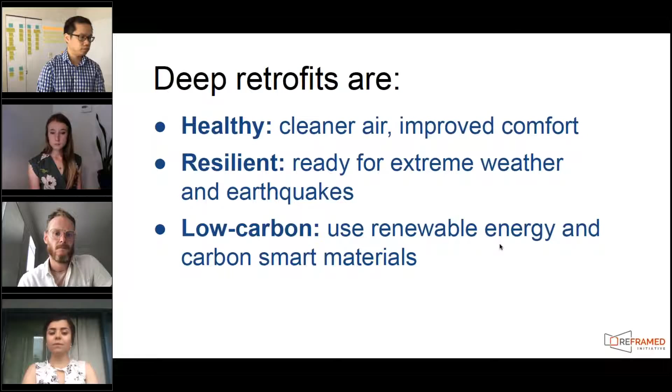Scaling up retrofits is not an easy task, and we have to keep these goals in sight. We need to keep rent affordable. We need to minimize tenant disruption, particularly in cities like Vancouver, where the vacancy rate is below 1%. And we need the energy efficiency investment to return value to the owners and investors.

To get everyone on the same page, we created a primer for today's webinar. It's available for download in the Handout section of your GoToWebinar panel. The primer will also be posted online together with the recording of today's session.

The primer highlights the importance of addressing embodied carbon as we look for building retrofit solutions. It briefly describes several building retrofit strategies for reducing embodied carbon and explains why and how embodied carbon is becoming the dominant source of building emissions in certain areas. We are hoping that the primer kickstarts further discussion.

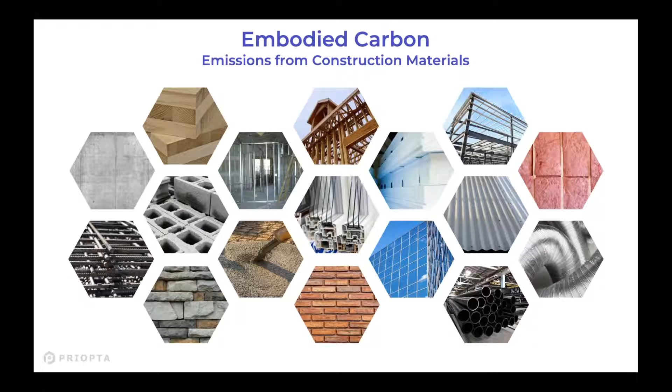And they're often actually hidden from us. The energy side of things is very easy to measure and quantify. But when it comes to the materials, we actually have to think through what are the emissions associated with extracting those resources, transporting them, manufacturing, processing, construction, operation, and also end of life.

So this is a big deal because if you look at global emissions happening annually, about 28% of global CO2 emissions is attributed to building operations. That's heating and cooling and operating all of the buildings on the planet. That's 28%. The embodied carbon annually is about 11%. So that's all the new construction and major renovations that take place each year.

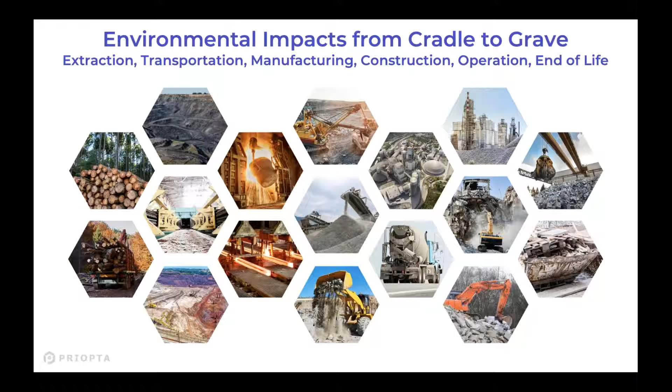That's about 11%. But what's interesting is, many people have seen that statistic, but there's also this great chart from the World Green Building Council that recently got released, which looks at the impacts of even 3 key materials used in buildings: concrete, steel, and aluminum. And if you look across all 3 of those materials, that accounts for 22.7% of global emissions. Obviously these materials aren't just used in buildings, they're also used in infrastructure, cars, and other products. But as the construction industry, if we can create demand for low carbon concrete, steel, aluminum, and other products, it has a ripple effect in other industries as well.

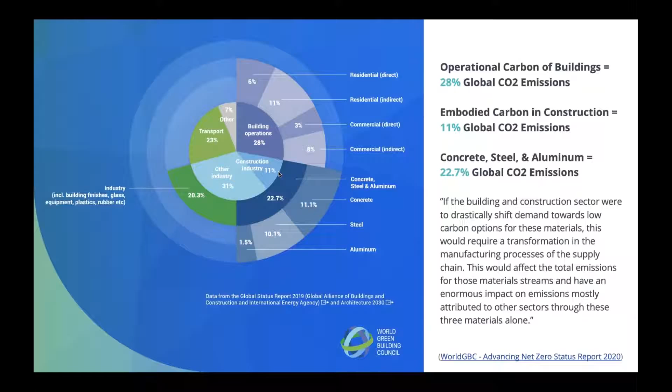So when we're talking about the impact of our industry, it's actually larger than even that 11% slice from an embodied carbon perspective. Now, if you just look at the new construction taking place between now and 2050, over the next 3 decades, for that amount of building stock, embodied carbon will account for approximately 49% of the overall emissions of that building stock over its lifespan, versus 51% for operational carbon.

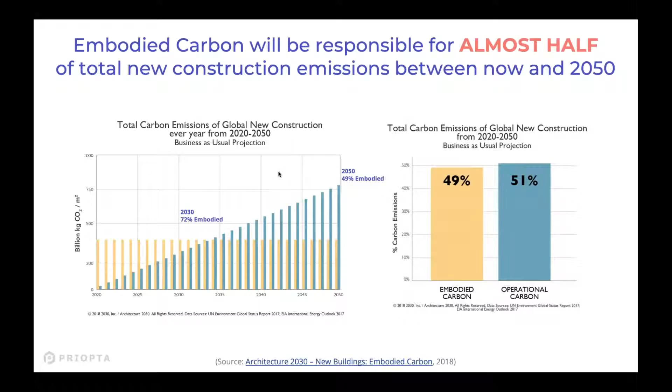This is a picture, or a simplified representation, of the emissions throughout the lifespan of a building. The yellow bars show the emissions happening each year to operate the building, and that's what we've obviously been focused on with our retrofits or with energy efficient designs of new buildings, to get this number down. But there are also the red portions, and that's the emissions associated with embodied carbon. There's a big pulse of emissions up front, and then there's also emissions associated with replacements and maintenance of certain building components and materials, and then emissions associated with end of life.

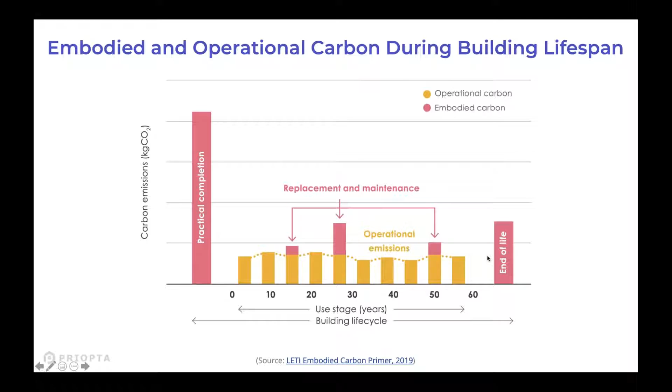So the A stage is the upfront carbon. The B stage is the use phase, so the building operation. Incidentally, the B6 portion, that's operational energy use. So that's the portion that we've been very familiar with: energy modeling, operational carbon emissions, etc. And then there's the end of life portion. So all the emissions associated with deconstruction, transportation, waste processing, disposal.

And then there's a module D as well, life cycle stage D, which deals with benefits and loads beyond the system boundary. So how do you account for things like recycling, reuse, where you don't include double counting in a way. So we usually report that separately as well.

Now, how does embodied compare with operational carbon emissions? In the operational world, we're very familiar with energy metrics, energy use intensity, EUI, but we oftentimes use that as a proxy for carbon emissions, but it's not always the best proxy. So if you look, this is from the CaGBC's report. The dark green bars show you baseline building performance, operational greenhouse gas intensities. And so you can see it varies significantly, right?

Like Vancouver might be 20, Toronto 26, Calgary could be like 71, which is partly due to the higher carbon intensity of their electricity grid. So these are just for baseline buildings. However, if you go towards higher energy performance buildings in Vancouver, we can get much lower numbers. So here's an example of those lower numbers.

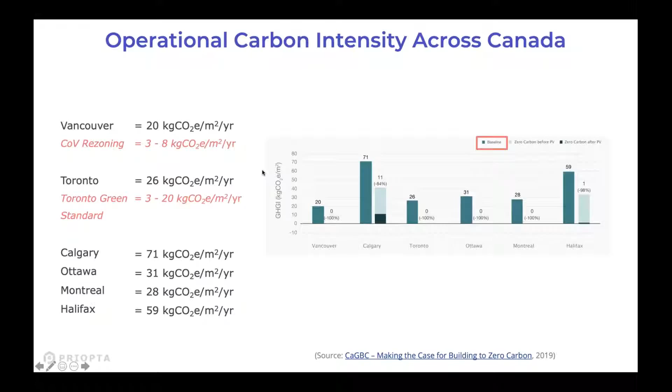So this was a great study done by Integral Group looking at the BC Energy Step Code. So you can see for each of the steps, step 1 to step 4 or 5, obviously the operational greenhouse gas intensities are going down, but actually the big factor to greenhouse gas intensity reductions is fuel switching. So all the green bars refer to natural gas or hybrid systems, whereas the blue bars are electric. So you can see obviously the electric ones are significantly lower.

They're below 2 kilograms of CO2 per meter squared at any step, versus the natural gas ones are, let's say, 4 to 13. But still, even the natural gas numbers are quite low relative to other cities and other regions. So now you have some sense of the operational carbon intensity, and this was just a picture of the variance in the carbon intensity of the electricity grid in different provinces.

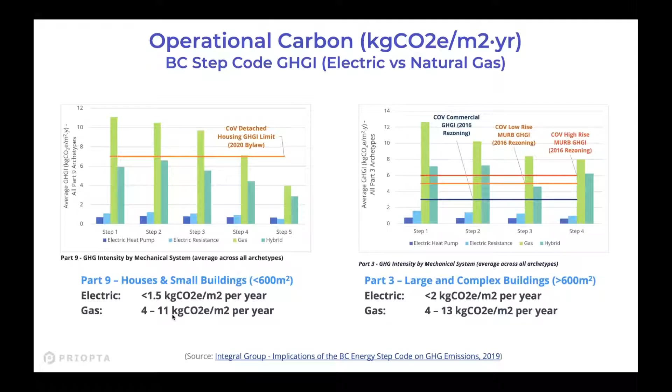So it matters a lot, the carbon intensity of the grid, and also the trend lines, like are these grid intensities reducing over time, and how does that factor into our operational emissions? So that was the piece on operational. That's just to give you some context when we're comparing those numbers with embodied.

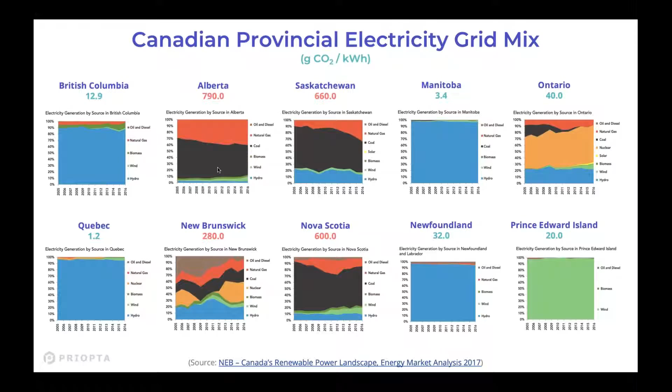So you compare that with the operational numbers, because in BC, we've gotten our operational greenhouse gas intensity so low, especially if they're electric buildings and step code, it's below 3 kilograms or below 2 kilograms of CO2 per meter squared. These numbers become the dominant factor.

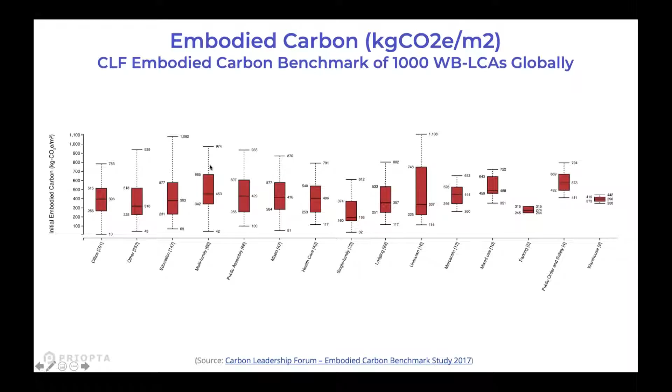At this stage, they just need to disclose the results, but next year I think they're going to update the rezoning requirements, where they'll likely have some sort of reduction requirement. Additionally, if it's not a residential building, you also need to go for LEED Gold. And so the LCA and looking at embodied carbon is one of the strategies that oftentimes teams overlook, but you can get up to 5 LEED points through pursuing those credits, depending on the percentage of embodied carbon reduction potential there.

So for all of these standards, CAGBC Zero Carbon Building Standard, ILFI, LEED, they have some requirement, or it's relevant to quantify and reduce these embodied carbon emissions. Now I'm going to get into some of the design strategies. In my typical presentation, I go through a lot more different materials like concrete, steel, and wood. But in this case, given the time constraints, I'm focusing on some of the key materials as it pertains to retrofits: glass, aluminum, insulation, refrigerants, mechanical equipment, and interiors.

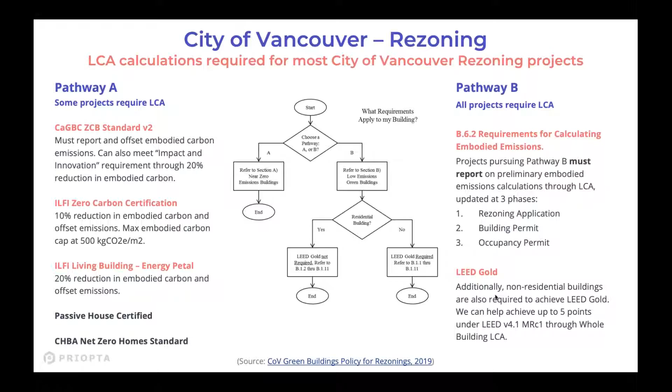So for glass, typically we use large quantities of glass, obviously, in the building. Whenever you're dealing with anything envelope related, it's important to look at the trade-off between embodied carbon and operational carbon. It may not actually be a trade-off, but you look at how to optimize across both of those domains, right? Obviously, if you have triple pane windows, that's another pane of glass versus double pane windows. But generally speaking, what I've seen is that the glazing is not a huge component of the overall impacts.

The frame actually is a big factor though. So it's not necessarily the glass, although there's obviously emissions associated with that, but pay attention to the framing options that you're using. Typically curtain wall assemblies are actually the highest embodied carbon impacts out of the different wall assemblies from what I've seen, and that's partly due to a lot of the aluminum mullions. But if you go towards timber framing, that can reduce the emissions a bit.

Segueing into aluminum, aluminum is a very high emission intensity product. It requires something like 10 times the amount of electricity as opposed to steel. So given that it's an electricity driven process, it matters where this aluminum is produced. For instance, in BC, because we have a very clean electricity supply, the aluminum that we produce is likely going to be very low carbon intensity. Although I haven't seen EPDs, environmental product declarations, for this, generally speaking we should have pretty clean aluminum.

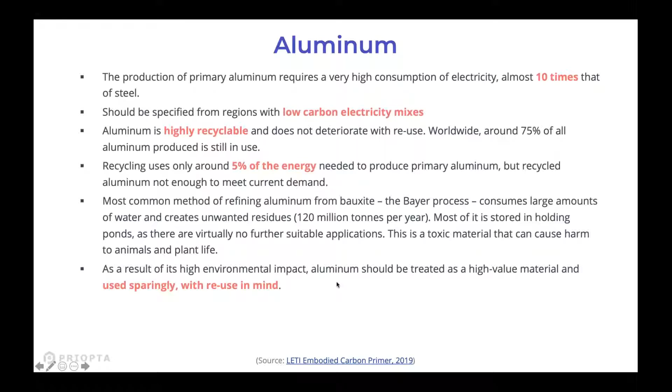Now, before I transition to the next topics, some of you may have seen this book before. It's called Drawdown. They looked at the top solutions to climate change, to reducing emissions globally between now and 2050. Many people will probably think of things like solar or wind or different renewable technologies as the top solutions. But actually the #1 solution in their original analysis was refrigerant management, which was very shocking to me and to a lot of people. They estimated roughly 89 gigatons of CO2 over the next 3 decades, which is equivalent to roughly 2 years of annual CO2 emissions.

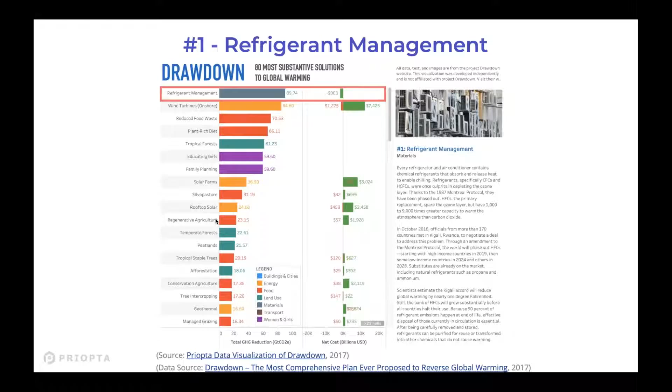In contrast, if you think about embodied carbon, we oftentimes talk about concrete. Their quantification of the emissions reduction potential for alternative cements was in the order of 7 gigatons of CO2. So it's interesting that refrigerants were so high. Now, whenever you see any sort of CO2 related statistics, from the IPCC's reports on global climate change all the way down to national reporting statistics, they're using what's called GWP 100, which evaluates a range of different greenhouse gases and makes them equivalent to CO2 over a 100-year time horizon.

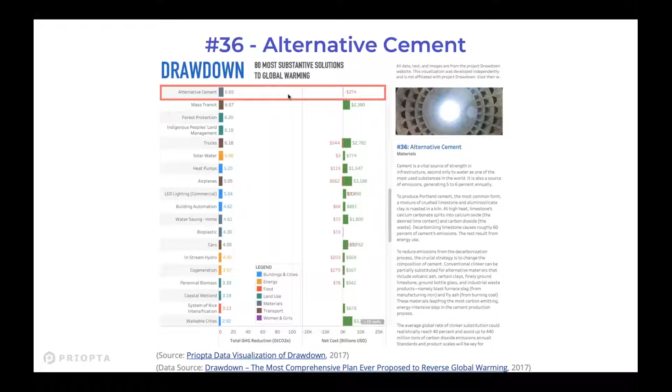And this makes sense because CO2 lasts in the atmosphere for thousands of years, and other greenhouse gases can last even longer. However, there are also some greenhouse gases that last much shorter. For example, you may have heard that methane is 28 times higher impact than CO2. But over a 20-year time horizon, it's actually 84 times higher. So it's about a 3x difference depending on which metric you use. And the same is true for different refrigerants. And why this is important is because methane's lifespan is something like 14 years.

For most refrigerants, HFCs, hydrofluorocarbons, they're about under 20 years for many of these refrigerants. So looking at a GWP 20 metric, you actually see for many of these refrigerants, they're 2 to 3 times higher than even the emission figures that we typically use in all of our calculations. So that means if we actually reduce these emissions, we have a very immediate impact on climate change, much more so than even CO2 in a way, because when you decrease these emissions, they stop having an impact on global climate change more immediately. So it helps us avoid tipping points, etc.

So why I'm bringing this up is because we actually use those HFCs not just in refrigerants in our HVAC equipment, but also in our insulation. So for example, if you look here, this is in particular XPS insulation and spray foam insulation. In North America right now, it's mostly using HFCs. Actually, I think for XPS, we only have HFC blowing agents for those. And remember those life cycle stages I mentioned earlier? Module B is a big chunk of those emissions.

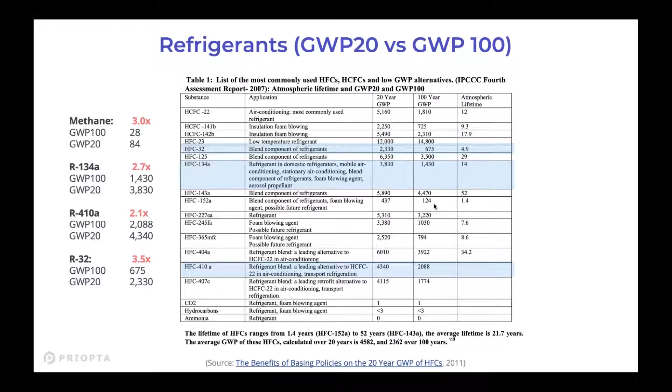So most materials are typically inert and not really emitting emissions, but with the exception of these ones which have blowing agents. And so if you look at the LCA studies, the EPDs from these different manufacturers from Dow and Owens Corning, you see that they actually have pretty significant emissions at the operation phase and also at the end of life stage.

And why I bring this up is because some of these emissions have been underestimated in our whole building LCA calculations. So the 3 main tools that are typically used in North America, Athena, Tally, One-Click LCA, what I've seen is that some or all of their XPS entries are oftentimes about 10x lower than the numbers straight from the EPDs from these different suppliers. And part of it may be due to how they accounted for HFCs, et cetera.

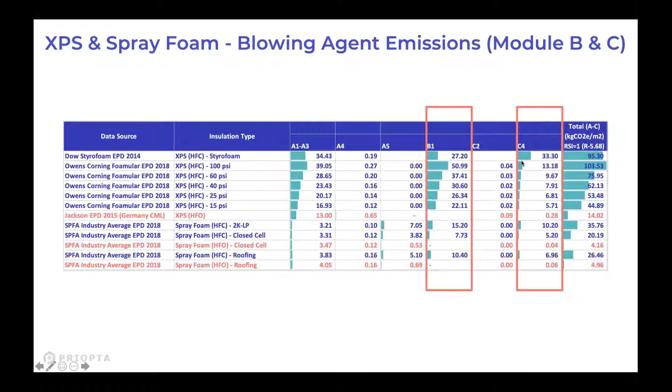And so compare those numbers with the whole building LCA numbers that I mentioned earlier, and you can see why these numbers are quite significant and how some of our previous LCA studies, if they have XPS and spray foam in them, may have actually underestimated these emissions quite a bit.

Now, there is going to be new HFC regulation coming in Canada and certain US states starting January 1st, 2021. So there will be alternative XPS and spray foam that uses lower global warming potential blowing agents. So make sure you specify that if you're in those regions. Or actually just in general, you should specify that.

I may be actually going a little bit over time.

So in terms of refrigerants, we need to worry about the global warming potential of different refrigerants and also the leakage rates. And there's a lot of uncertainty as to the percentage of leakage happening each year. I've seen figures of, let's say, 2%, sometimes up to 10%. But I've also heard anecdotally that sometimes in HVAC systems, when they leak, the whole system leaks. So then you've actually lost 100% of the system. So we need to get a handle on this leakage rate data.

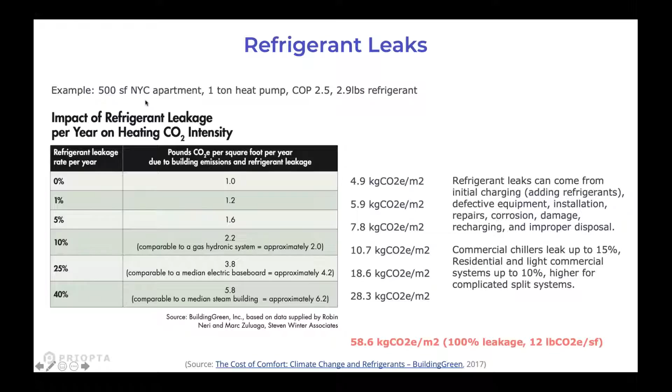So these assumptions do matter significantly. When you're doing retrofits, think about your refrigerants, what type you're using, and the leakage rates. And that was just on the refrigerant piece. When talking about mechanical equipment, we typically don't include this in the scope of our whole building LCA calculations because we're mainly focused on structure and envelope, and there's not really good data for mechanical equipment.

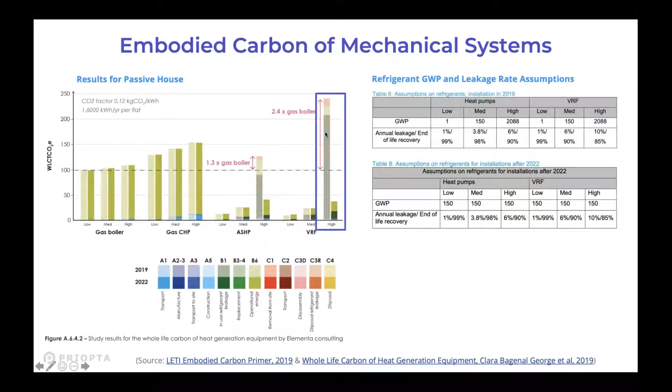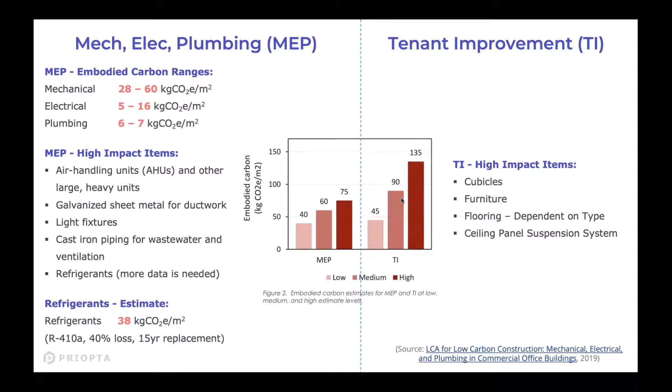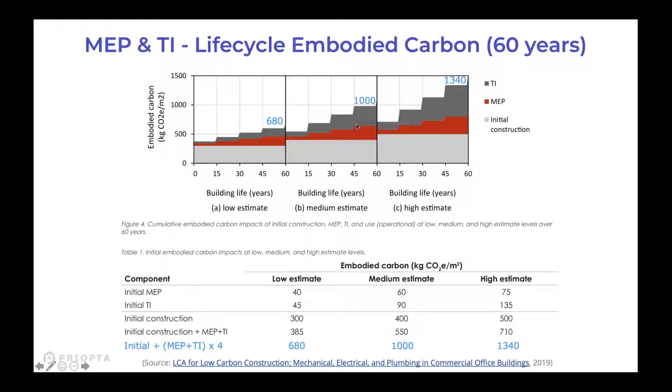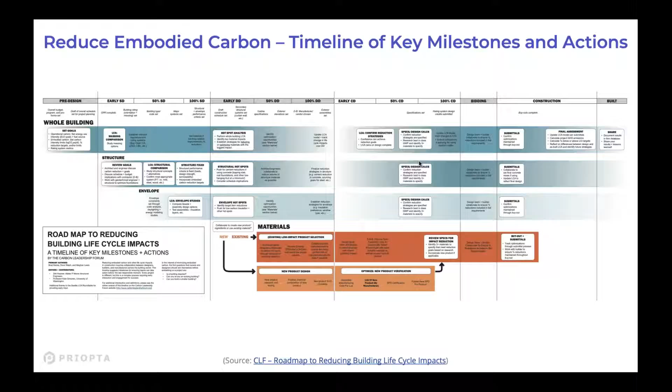Great, thank you so much, Anthony. Yeah, very useful, no problem. Very useful to see how embodied carbon compares with operational carbon emissions in buildings, considering the carbon intensity of the electricity grid. I personally find it very important to highlight why we really need to have these discussions and think about embodied carbon in our building design processes. And also very useful to hear from you what are some specific design strategies that can help us reduce embodied carbon in building retrofit in particular. Thank you very much for your presentation. With that, I am going to invite our next speaker to the screen. Lindsay, over to you.

Great, thanks. And let me know if you can hear and see my screen. All good, yeah. Perfect. All right. Hi, everyone. Thank you for having me. I'm thrilled you're here and wanting to learn more about embodied carbon reductions.

And I'm thankful for Anthony for introducing embodied carbon and providing a lot of great resources and great opportunities for reduction. I wanted to share with you a combination of work that'll hopefully give you a bit more insight on how to reduce embodied carbon in your work. So the question of the day: how do we reduce embodied carbon? The way we've been looking at this issue at Architecture 2030 is pretty similar to how we look at meeting operational code requirements.

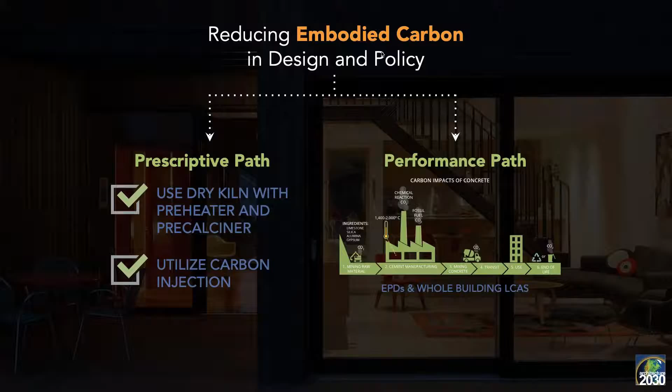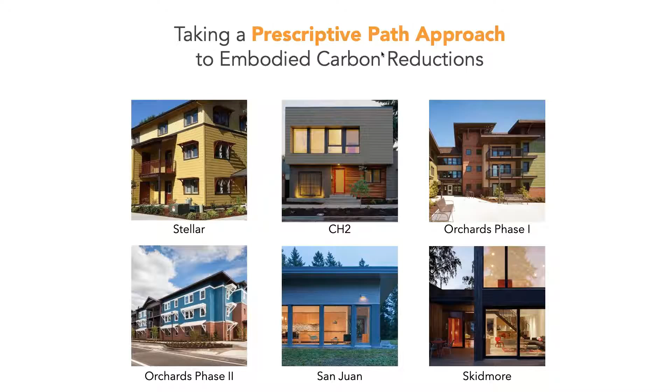The research project I want to share with you is one I did with Allison about 3 years ago, in which we modeled and compared the embodied carbon impacts of several Pacific Northwest passive house projects. We focused on passive house because both Allison and I are certified passive house consultants—I began as a CPHC about 5 years ago—but also because passive house sets a very high standard threshold for operational energy performance. We wanted to see what the embodied carbon impact of that was, and whether there were opportunities for reducing embodied carbon while still meeting stringent operational performance requirements.

So how do we go about doing this? Right around the start of this research, Allison and colleagues published the Passive House Details book, an incredible resource that includes wall assembly details for many passive house projects in the Northwest and across North America as a whole. I took six of these details and modeled them in Revit, then ran them through Tally, which, if you're not familiar, is an embodied carbon plugin for Revit developed by the design firm Kieran Timberlake.

Within Tally, you can control inputs like the type of material, transportation distance, etc. It uses a database of EPDs and multiplies the embodied carbon impact by the material quantity in your design. I should note that typically you'd want to do a whole building LCA, but for this comparison we simply modeled a 5 by 5 foot area of wall assembly—not the roof or floor assembly, which often have a much higher embodied carbon impact due to structural requirements, foundations, and a higher amount of insulation.

I also want to note that we used Tally 2017, which does not have the same features available in the latest version of Tally. That would likely change the results slightly if we were to run it again today.

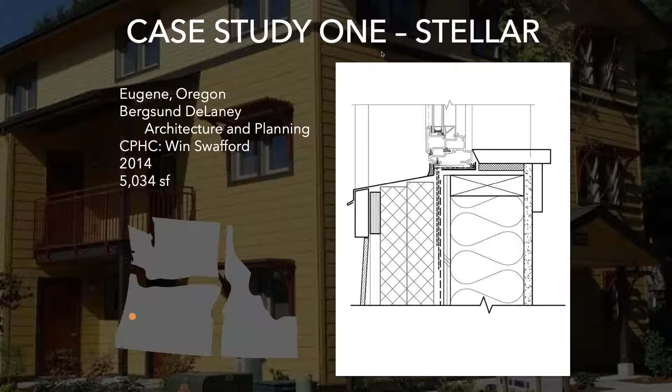So the first case study we looked at was the Stellar Apartments. This was the first affordable multifamily passive house in the US, located in Eugene, Oregon, completed around 2014. From inside to out, this wall assembly was gyp, a 2x6 stud with blown-in cellulose, OSB with the seams taped as the air barrier, and then outboard of the stud was 4 inches of polyiso and fiber cement siding.

The second case study was a single-family residential project in Portland called CH2. For this wall assembly, inside to out, we had gypsum board, a 2x4 with blown-in fiberglass, plywood with the seams taped as the air barrier, a 9.5-inch TJI with blown-in cellulose, 1.5 inches of fiberboard, furring, and then fiber cement siding.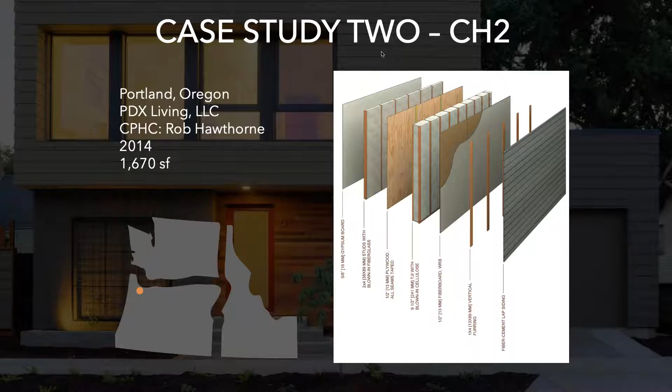The third case study was a very large multifamily project: Orchards at Orenco Phase 1, also located in Portland, Oregon. From in to out, this was gyp, a 2x10 with blown-in fiberglass, plywood as the air barrier, 1.5 inches of mineral wool, finished with fiber cement siding and brick. For this comparison, we chose a segment of the wall that used brick, since most of the projects actually used fiber cement siding, so we wanted a bit of a comparison there.

We also looked at Orchards at Orenco Phase 2, which was the exact same wall assembly, also located in Portland, except they were able to reduce the thermal components of this envelope while still meeting PHIUS certification. The 2x10 with blown-in fiberglass became a 2x6, and the 1.5 inches of mineral wool was reduced to 1 inch. Again, we looked at a portion of the wall assembly with brick.

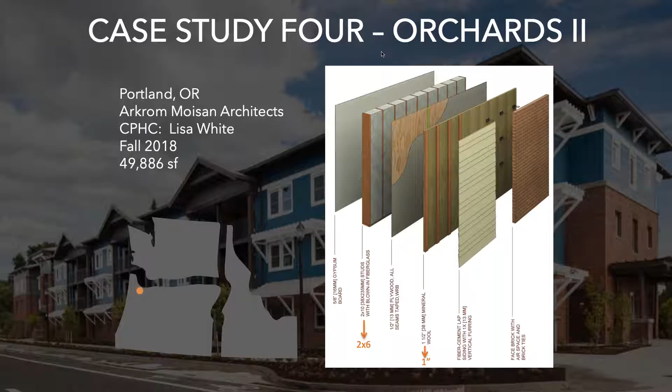So the fifth case study we looked at was San Juan, another single-family residential located in the San Juan Islands in Washington, completed around 2013. From inside to out, this wall assembly had gyp, a 2x6 with dense packed fiberglass, OSB with the seams taped as an air barrier, another 2x6 with dense packed fiberglass - so a double stud wall approach - and then 1/2 inch of fiberboard, steel furring, and fiber cement siding.

And then the last case study we analyzed was Skidmore, another single family residential, located in Portland, completed in 2013. From in to out, this one had gyp, again as always, a 2x8 with blown-in fiberglass, plywood as the air barrier, 3 inches of polyiso, wood furring, and then vertical wood siding.

So how do they compare? This is normally where I would ask you what you think - which wall assemblies have the highest or lowest embodied carbon, or if you think they are all roughly the same. So I want you to think about that mentally, and then I'll share the results with you.

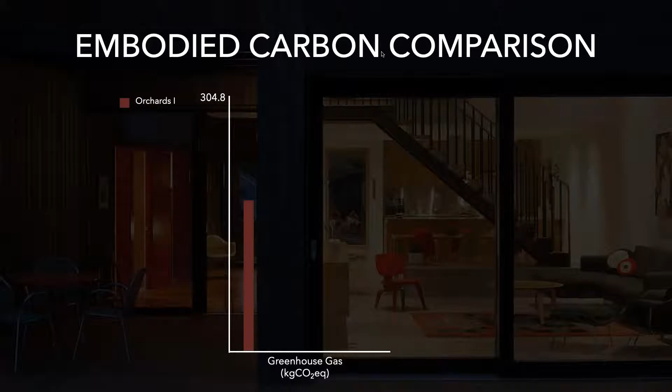So drumroll please. From lowest to highest, we have Orchards at Orenco Phase 1, Orchards at Orenco Phase 2. So you can see that the reduction in the thermal envelope did in fact reduce the embodied carbon of that wall assembly - not surprising. Then we have CH2 and San Juan.

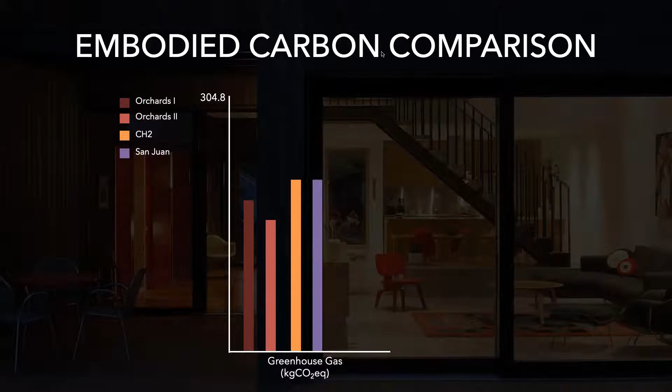And from there we have Skidmore and Stellar. So you'll see some common groupings here. These first two were a wall assembly that had a stud and then exterior mineral wool. The second two here took a double stud wall approach. And then the last two here were a single stud with insulation and exterior rigid insulation, so they both used polyiso.

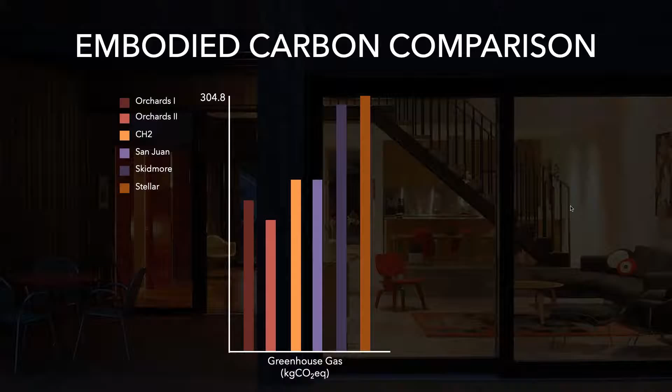All right, so this is great, but you're probably curious what materials contributed the most to each wall assembly's embodied carbon impact. To dive into that a little bit, for Orchards 1, brick actually made a significant impact. Had we looked at fiber cement siding, this would probably be lower, but the brick alone was about 1/3 of that wall assembly's embodied carbon impact.

Plywood, the 2x10 with fiberglass. Mineral wool, also a pretty significant chunk. And then gyp.

For Orchards Phase 2, same amount of brick, so same amount of embodied carbon, same with the plywood. You'll see here the 2x8 with fiberglass, a slight reduction in embodied carbon from the 2x10. And then the 1 inch of mineral wool, a more significant reduction from the 1.5 inch. And then gyp.

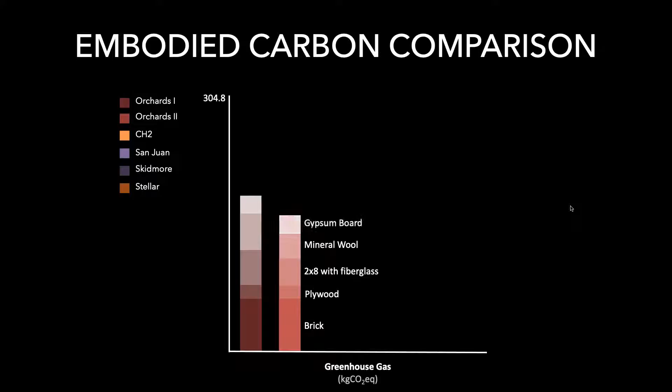For CH2, medium density fiberboard - this is surprising for quite a few people, but it actually has a really significant embodied carbon impact, and again this was only 1/2 inch of material. Plywood. The wood furring. This is the 2x4 with fiberglass and the 9.5 inch TJI with cellulose.

One note here - so CH2 uses a TJI, but that wasn't a material available within the Tally database. So for this study, we assumed a 2x10 stud. Even though TJIs have less material overall, they do require more manufacturing, more adhesives, and would likely result in a higher embodied carbon impact. Though I would be curious to see how much of a difference that would make.

The fiber cement siding - here you can see the difference between the fiber cement and the brick. Had we looked at a portion of the wall in Orchards that used fiber cement siding, you could see it'd be a reduction there as well. And then gyp.

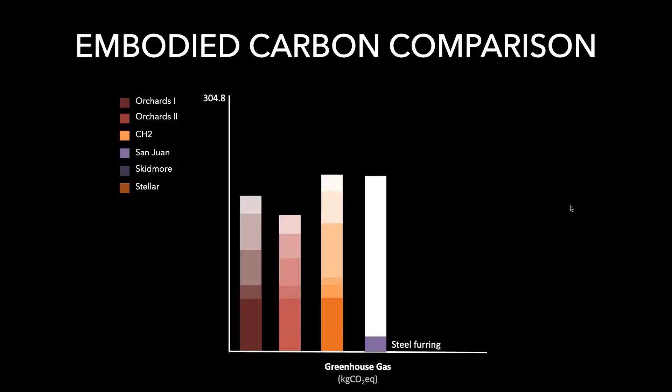For San Juan, so the steel furring, medium density fiberboard, again a pretty high impact. OSB - you'll see OSB is higher than plywood for the same function within the wall. This is the double studs, the 2x6 wall assemblies with fiberglass, the fiber cement siding, and the gyp.

All right, for Skidmore: plywood, the wood siding, the 2x8 with fiberglass, 3 inches of polyiso. You can see it's almost half of this wall assembly's embodied carbon impact. And then gyp.

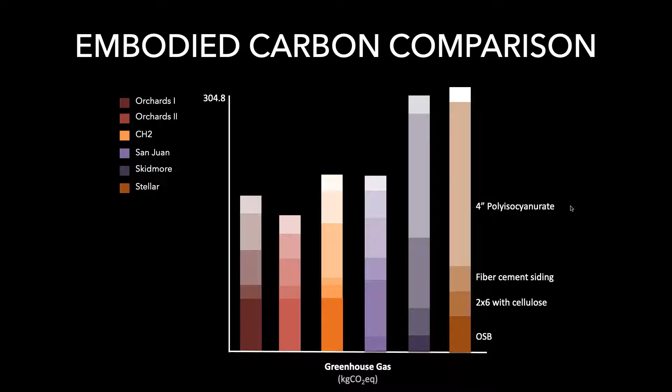And then finally with Stellar, we had OSB. Here they used a slightly different thickness, so you can see it's a higher embodied carbon impact than other wall assemblies. The 2x6 with cellulose, fiber cement siding, 4 inches of polyiso - again now almost 2/3 of the embodied carbon impact of this wall assembly, and gypsum board.

A few notes here: the variances you see in similar categories account for different assumptions. For example, different densities of fiberglass affected the embodied carbon impact, and different thicknesses of OSB also had similar effects. So if you're using Tally and these tools as a performance path approach, the assumptions you make have a huge impact on the results you get.

So they say the tools are only as good as the user, but it is a good opportunity to get a better understanding of embodied carbon.

I also want to note that the newer version of Tally offers the opportunity to include biogenic carbon, which this version did not. Including biogenic carbon for timber products and cellulose results in a lower, and often negative, embodied carbon value, because it gives credit for the carbon sequestered by the tree during its time growing. There's a great tutorial on this topic done by Tally.

I'd be happy to provide the link to that. I should have included it on the slide, but the newer version of Tally does include that opportunity, and it does make a pretty significant impact.

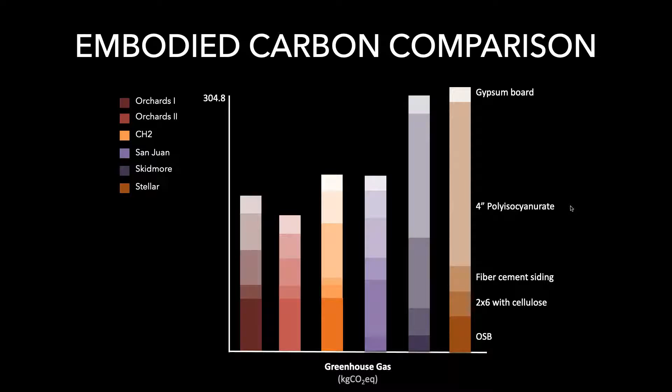To conclude this portion, as you can see, blown-in cellulose and fiberglass had a lower embodied carbon impact than rigid insulation. I should clarify, in case it's needed, blown-in is very different from a blowing agent. There's a very significant difference there.

Other conclusions: polyiso and MDF, the medium density fiberboard, were major contributors. Mineral wool also had a high embodied carbon impact. However, in those first two Orchards wall assemblies, it was lower overall than the other wall assemblies. So if you have to use a rigid insulation for climatic conditions or whatever, it's probably best to choose mineral wool over polyiso, EPS, and especially over XPS.

And again, a reminder that this study only addressed wall assemblies, so it's equally important to do a whole building LCA and look at the roof and floor enclosures as well.

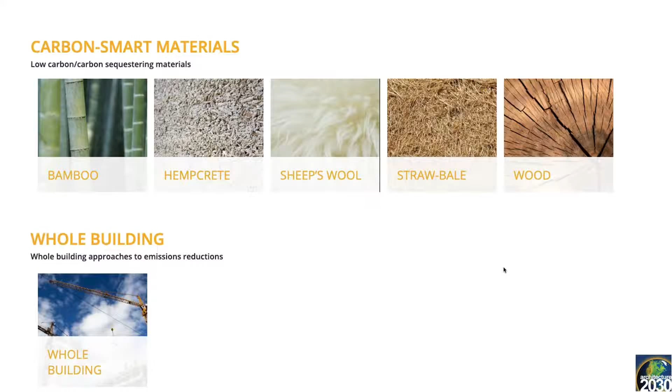Each material we call a swatch of the palette. Each material swatch contains an introduction with information on the carbon impact of that material or material category. It also talks about carbon smart attributes — what qualities of the material or manufacturing process can be used to reduce embodied carbon. The second set is design guidance: how do you design with that material to reduce embodied carbon?

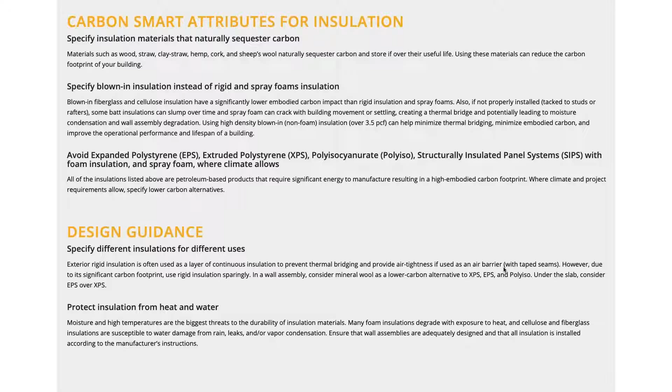Several of the swatches also include an acknowledged challenges, questions, and unknowns section. The palette is a living document, intended to be updated over time as more information becomes available and technology advances. For example, we recently updated the concrete swatch, and we're working on updates to the wood swatch currently. But for insulation in particular, an acknowledged challenge is balancing operational performance with embodied carbon impacts, as well as the fact that insulation decisions are highly climate dependent and situational dependent within the project.

So just to dive a bit into each material, and thank you Anthony for focusing on aluminum and glass, so I can cover the rest of it.

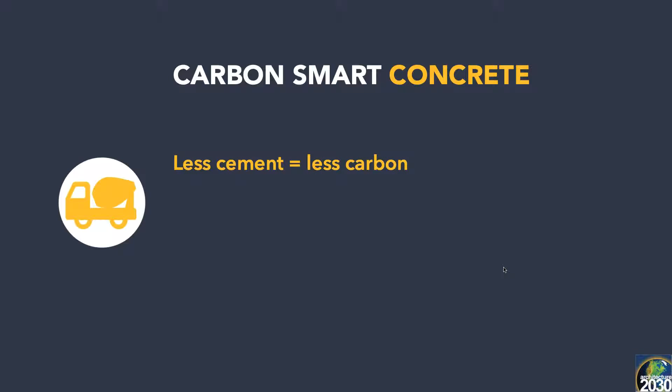For concrete, the most impactful thing you need to know is that less cement means less carbon. You can often use cement as a proxy for global warming potential, so if you reduce the amount of cement within a mix, you're reducing the embodied carbon impact. Typical practice is to specify a minimum amount of cement and/or a maximum allowable amount of SCMs. Instead, we're saying flip that around: specify a maximum cement content, or specify the required compressive strength at a specific age. Those are opportunities for reducing the embodied carbon of concrete through specification.

For steel, specify steel with a high recycled content. There are two different manufacturing processes for making steel. One creates virgin steel, using raw materials to create a new steel product. The other, an electric arc furnace, similar to aluminum as Anthony was saying, recycles existing steel into new steel products. The electric arc furnace is about five times less embodied carbon impact than the basic oxygen furnace, which creates virgin steel. So if you're specifying steel with a high recycled content, you know it's going to come from an electric arc furnace, which is powered by electricity. So similar to the grid mix information Anthony shared, where you're getting that steel from does have an impact. There are opportunities for getting steel manufactured using completely carbon-free renewable energy—there's actually a handful of steel mills within North America that do just that.

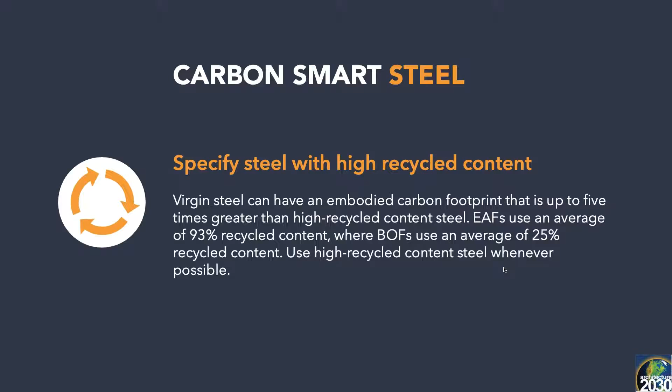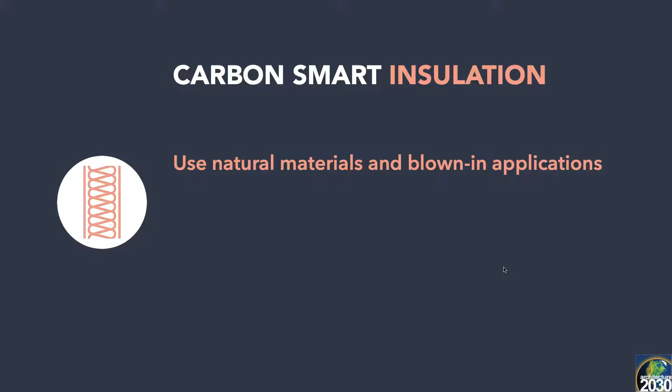For insulation, use natural materials. There are so many materials that naturally sequester carbon that can be used as insulation, so look into them and start incorporating them into your designs.

Also use blown-in applications—this is different from installations with a blowing agent. Blown-in fiberglass and cellulose are recommended because if you're using batt insulation, it can often slump, meaning it settles over time. That can lead to thermal bridging, which can lead to moisture condensation, which can lead to assembly degradation, which increases the embodied carbon impact because you have to replace that material. What we found is that using blown-in insulation actually reduces that potential.

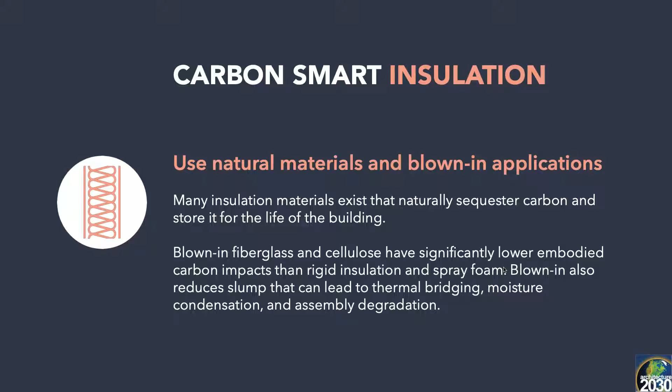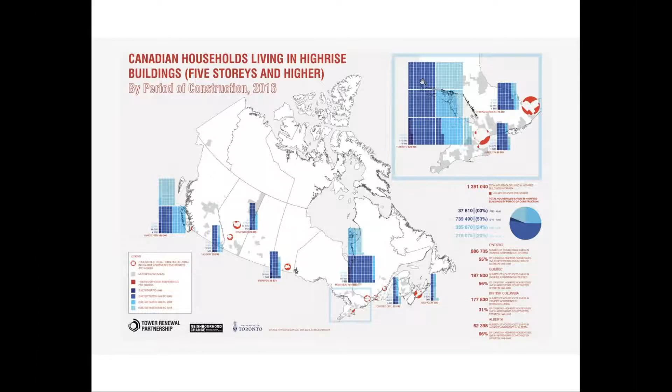So if you look at Vancouver, it's almost a third of the different eras of high-rise housing, including the older 60s stock. But if you look at the Toronto stock or Ottawa or elsewhere, the majority of high-rise housing is that first generation. So that's the focus of this. It's about 700,000 units across the country. And some of the aging is becoming critical.

So we're finding some buildings that are simply having to go offline because of failed systems, failed electrical systems. The elevators are routinely failing, and especially in COVID, with people sheltering in place, it's become quite an acute issue. There's an imperative to keep these buildings going in a way that's healthy, appropriate. And now looking through the lens of embodied carbon, how do we do it in the best way possible? So a lot of our focus is how do we make this work?

Doing retrofits like this is highly capital intensive. So you need the finance structure in place. You need the standards. And this conversation today is really what are some of the metrics of standards by which owners, decision makers, and designers engage in setting the specifications for these projects. And you need a retrofit industry that's ready, especially a retrofit industry that can tackle buildings with residents in place.

So a lot of this has been a lot of policy pushing and activism and making voices heard that this is an imperative, and how do we push the players and the stakeholders to be able to bring investment to these buildings. And a major victory has really been with the National Housing Strategy, which launched a repair and renewal program of several billion dollars to be able to kickstart the first generation of deep retrofit across the country.

And we have fantastic leadership in Hamilton Housing, just outside of Toronto, who have a passive house and low energy mandate for their entire stock. They have a new building program going for new buildings, and they also, looking at their existing stock, wanted to engage in EnerPHit. So we've worked with them since 2017 to engage in feasibilities and to put the applications together for grant funding and everything else to be able to reach this goal.

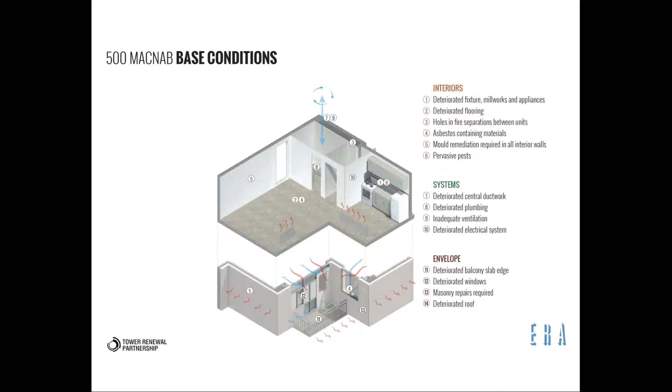And so this is a typical unit. This is a long list of all the things that were deteriorated, including huge amounts of asbestos, mold embedded in walls, completely deteriorated soil stacks. So there was a massive state of repair piece, but then also the layers of achieving EnerPHit. So, a big winter coat on the outside of the building, triple glazed windows, and a strategy of active and passive ventilation to be able to provide both heating and cooling to the building.

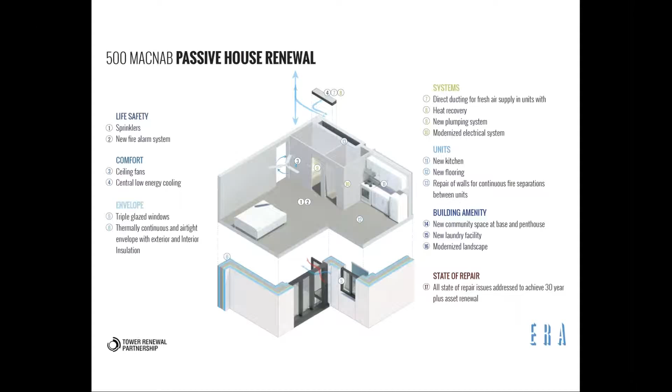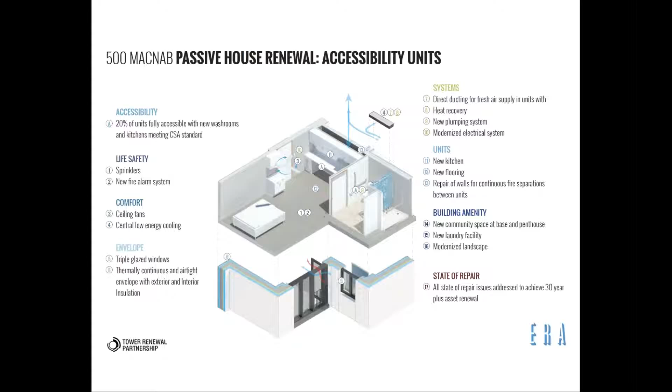And it's a seniors building, importantly, and it was very critical that we maintained comfort. So cooling and a light active cooling strategy was required. And the difference between this image and this image is the major works required to provide a barrier-free unit, which is quite a bit of work in there that was a mandate to the project, but quite a big part of it.

So looking at the envelope. When we first started this project, this is what it looks like. It's sort of block wall with masonry veneer, very robust. We imagined we'd do this from the exterior, to achieve our R38 effective wall. It was a layer of mineral wool and then a layer of mineral wool EIFS on the outside of a sheathing layer. So a sort of a double ply wall. And to make that work, we had to have fiberglass clips and a large thermally broken structure to do this. So that was the first strategy.

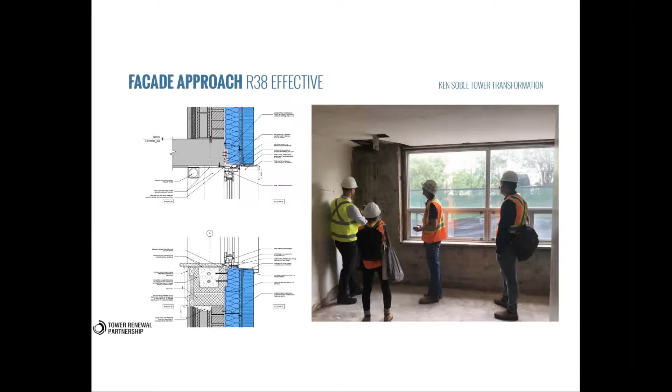When we got into investigations, we realized there was pervasive mold throughout the interior walls. So for better or worse, we had to gut the inside of the building to remove all of that wall, which provided a much more simple wall assembly, one you couldn't do with residents in place, but one that made sense in this particular project, which importantly is empty. The building was actually decanted of residents because of the poor state of building quality before construction. So it makes this project a bit of a prototype to say, how would we then do this in a building that's occupied?

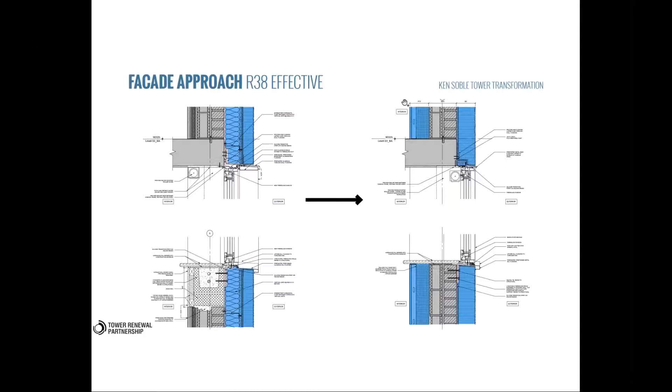And then, of course, as all passive house designers know, there's the exhaustive process of meeting your target and getting your PHPP and getting your pre-certification. And so we looked at a whole series of things, from metal clips to fiberglass clips to where the plane of the window was, and landed on our pre-certified design.

And another piece where we certainly are contributing to embodied carbon is we made the decision to remove the balconies. And the reason for that, through a whole series of studies, is that the kit just isn't available in North America as it would be in Germany or Sweden or other jurisdictions for ready-made balcony enclosures that would have the thermal performance for EnerPHit.

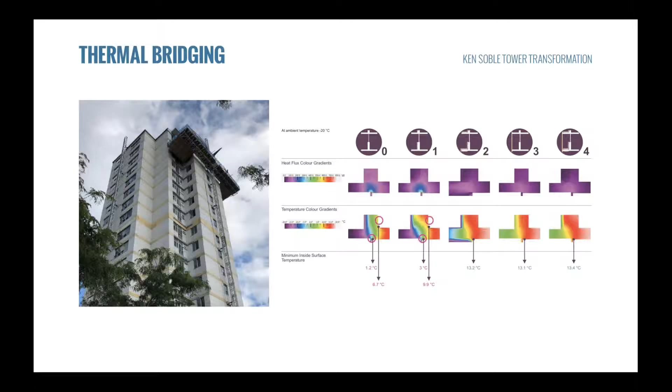So after long discussions, and a main one being there was about a foot drop to make sure that they're actually accessible and barrier-free for a seniors population, the owner decided, let's remove them and make sure we have a thermally tight envelope. But that certainly won't be the strategy for each of these buildings. So it's innovation required here.

And this is a look at some of the windows going on. This is the air barrier, which is fluid applied. And then the mineral wool EIFS will go on top of that. It's a 6-inch buildup.

Then into the ventilation strategy. So we piggybacked off the existing system using the existing cavities throughout the building, putting in new distribution and bringing in direct ducting into each unit, as well as sprinklers into each unit as well. The building hadn't been sprinklered. And so this was interesting.

So we really debated unitized versus centralized, and we ended up going centralized in this case because the point tower configuration made it work, but also the owner, as it's a rental building, didn't want to have to change 147 filters, so really encouraged us to go, and they were about cost neutral. So in this case, it was a centralized system.

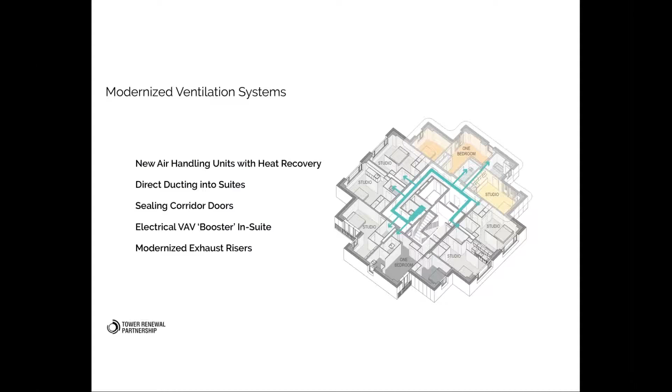This is some of the heating and comfort studies we did with the major consultants on this project. One is JMV Consulting, which is Vancouver Island based, really fantastic Canadian consultants who I recommend everyone work with, as well as Transsolar out of Germany, who've done quite a bit of these high-rise EnerPHit projects. And it was really looking at not just meeting the EnerPHit standard, but looking at what from each exposure is the effective comfort that we'd be achieving. So this was a driver.

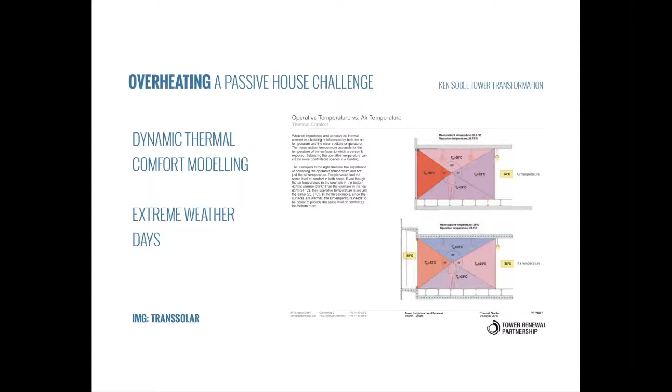And then this is looking at our graduated cooling strategy. So ceiling fans through ventilation, but also a centralized dehumidification and light cooling, and then a cooling boost within each unit, as well as a heating boost within each unit that's directly resident controlled.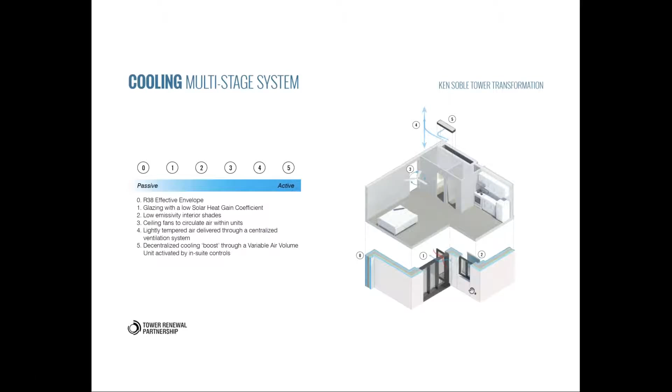One of the issues, we wanted to do exterior shading. It was too expensive to bring over sort of European style exterior shading, so we've gone with interior blackout blinds, but with an 18% window wall ratio, it passed all the EnerPHit requirements, thankfully. And we also modeled performance on 2050 projected data. So we weren't looking at the present, we were looking at the future and ensuring comfort.

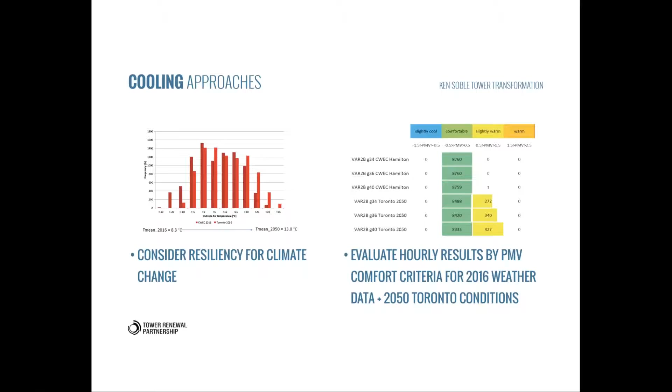And so we were able to look at some of the metrics that were discussed earlier here, and to say, even though we're meeting Passive House in terms of energy per square meter, let's fuel switch for heating and go to heat pumps in order to go to electricity. We wanted to pull the gas line completely on the building, but we were prevented for domestic hot water. To heat domestic hot water electrically, unfortunately, would require a larger transformer than was available within the city district. So it was a logistical issue outside of our control. So the only gas in the building was domestic hot water.

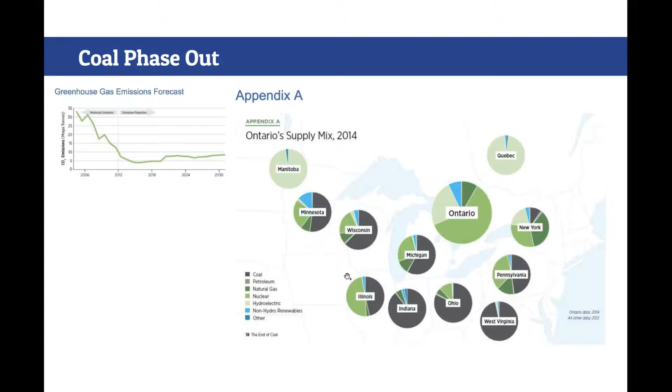The next one is envelope. So envelope was quite a discussion, and the issue, a big one, was safety. So after Grenfell, myself and my team were actually in London when Grenfell happened, and we were meeting with building officials and touring sites for other reasons, and then became kind of embroiled in it. And it was quite an intense experience.

We were actually able to meet with the fire marshal and others when this was all happening. While each system is permitted in our building code, we felt, and the owner felt strongly, that they wanted no combustibility whatsoever on the exterior of the building. So for that reason, we designed this as mineral wool.

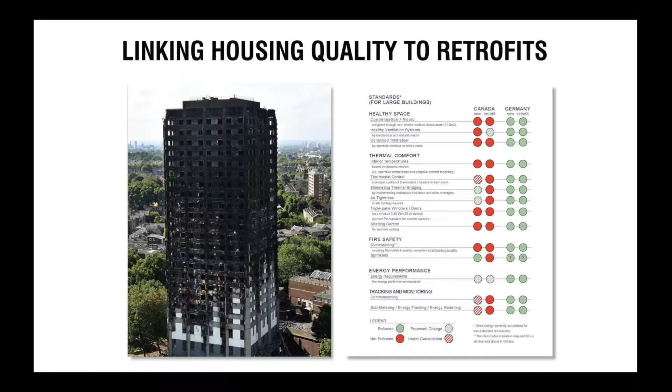And then the added value was, when we did similar analysis to what was discussed earlier, there's such a compelling embodied carbon argument. You could really make the case that if we had gone with EPS or another system, what's the point of even going EnerPHit? So I think that building an embodied carbon argument or metric into the standards is absolutely fantastic. The other one, of course, is demolition versus renewal.

So every time we do a retrofit project, there's always the voice in the room that says, why don't we just tear it down and rebuild it? It would be faster and cheaper. What we found in our set of projects is that it's neither. In terms of cost, even doing this EnerPHit project, which is highly ambitious and nearly an entirely new fit out in the interior, it's still substantially cheaper than if we had torn down and built a new comparable building. And then, of course, there are the social costs if these buildings are occupied.

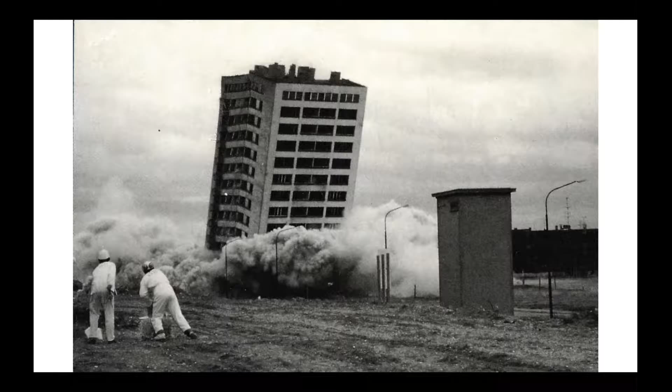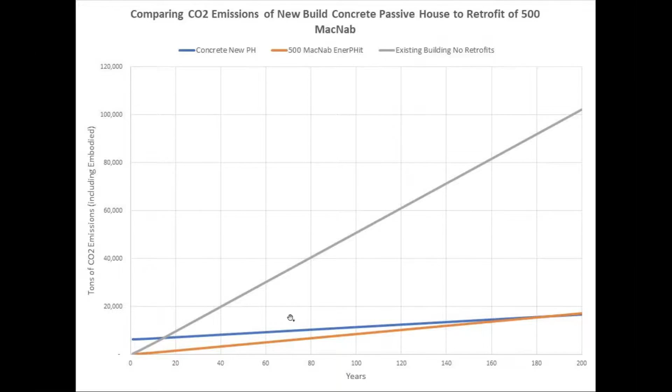So this is the building. It makes a compelling argument that this is the way we should go with retrofits rather than tear down and build new. And if we looked at the stock countrywide - I'd love to do this for embodied carbon too - but just for operational carbon, you could cut up to 3 megatons annually just from the gas loads.

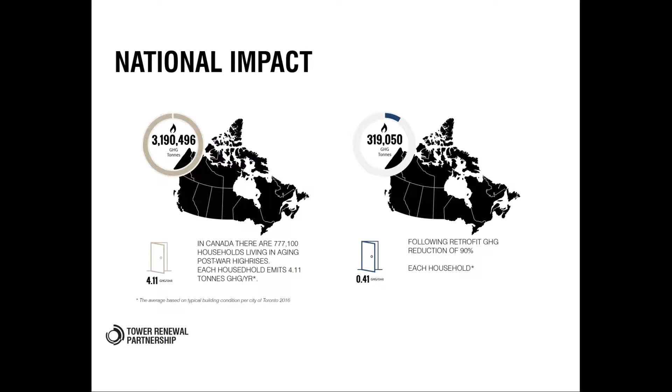We're working with CMHC on this, on a longitudinal study looking at some energy and non-energy benefits. I'd love to share that once it's released post construction.

We're also engaged in some studies really looking at how, when you do a project like this with retrofit, you realize there's a lot of products and materials that simply aren't available yet in our marketplace that we know are available in Europe and elsewhere. But because of the advancements of the STEP code and the great work happening in BC, we were able to spec all North American and largely Canadian products for this EnerPHit, such as Cascadia windows and some HRVs and others that weren't available even a few years ago. So our industry is advancing rapidly, but there are still strides to go.

And another piece is looking really carefully at means and methods for engaging in a project like this with residents in place, which requires an entirely different set of solutions. So thank you very much, that's my presentation.

Awesome, thank you so much, Graham. It's always wonderful to learn more about Ken Soble and really seeing how strong leadership, in this case at Hamilton Housing, can make it possible to design to such great performance levels in retrofit projects. Thank you for sharing that project with us.

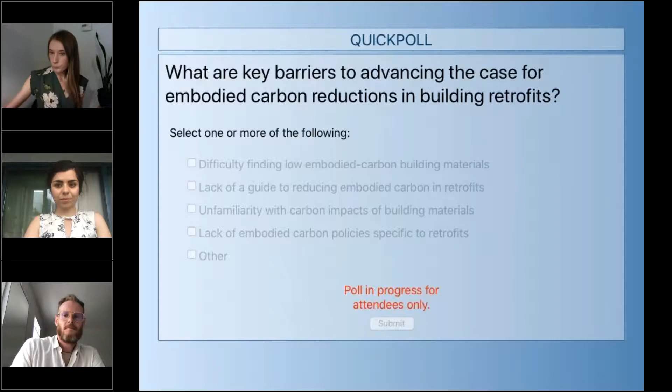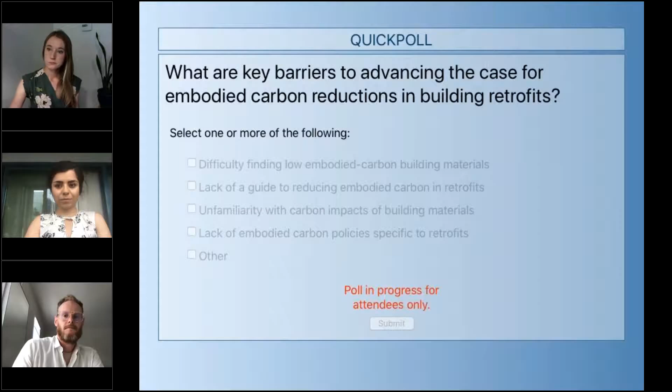Awesome, here are the results. The majority voted for lack of embodied carbon policies specific to retrofits as a key barrier. After that, unfamiliarity with carbon impacts of building materials and lack of a guide to reduce embodied carbon in retrofits were identified as key barriers by the audience.

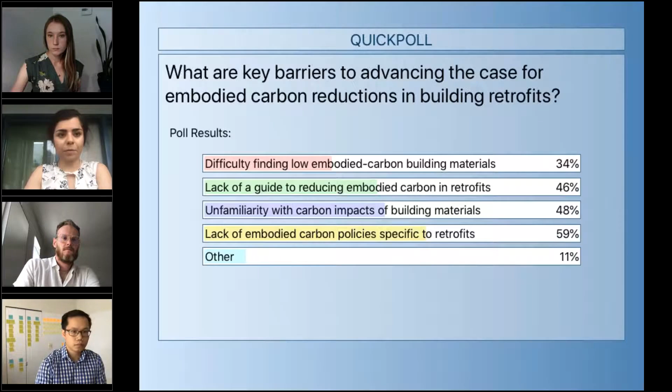Okay, there are lots of questions that the attendees submitted, which is great. I'm going to see how many of them we can cover in the time we have left. The first question I wanted to ask you all is, what do you think are the barriers to designing with low embodied carbon materials and system components? And secondly, what market or policy drivers do you think can move clients and design teams to include minimizing embodied carbon as a key project objective in our retrofit projects?

I'm happy to jump off if that's okay. Please, go ahead. Well, I thought your poll was excellent. So all of those are ones that I would agree with and probably ranked similarly to the audience. I would say that...

Policy is key. When it comes down to tough decision making and the tough value engineering discussions that always happen after you get your final costing, and the client realizes that they're short, we've been involved in several projects where suddenly the initial ambitions of the project slowly get eroded away.